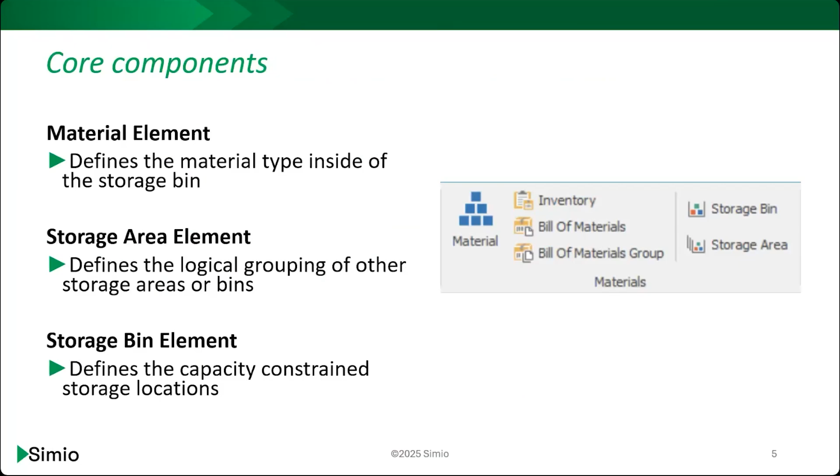To give a little bit of an idea, let's say we're looking at a warehouse with racks and product inside these racks. You might think of an area as the entire racking section, and within this we might have another sub-contained area that could be aisle 5. Within that area, we might have zone 1, composed of various bins - the bottom layer bin, the top layer bin, etc. And within those bins, we have all of our materials. This gives us a visual idea of what we're trying to represent with all these components.

And why is this so powerful? Why is this such an important aspect in the simulation space and within Simio? The first bit is it can help us define capacity constrained bins and areas. We don't have an infinite amount of space to store all of our material. If we did, that would be amazing, but that's not real life. We need to be able to simulate those constraints and understand how those limitations actually impact our system.

Through the use of these various elements, we're finally able to add that in a much easier, straightforward manner. Within all of these, we also have different selection rules to easily control how this inventory is accessed. Not everyone has the same rules to pick what product gets selected from what bin, from what area. So we've added the possibility to select what specific rules - whether based on time, priority, location, etc. - you want to use to control this inventory. This can mirror different strategies in your real warehouse operations and allow you to experiment with new ones.

Another great aspect about this feature is it can help you split inventory across bins. We might not have one single bin or a specific area that contains only one product, but materials that need to be split across multiple racks, multiple bins, multiple areas. We have to keep track of all of that. That sounds very complex because you have to track all the materials, possible locations, where those locations are stored, possible inventory levels of each storage area, etc. But now all of that complexity is streamlined and made much simpler thanks to all these elements.

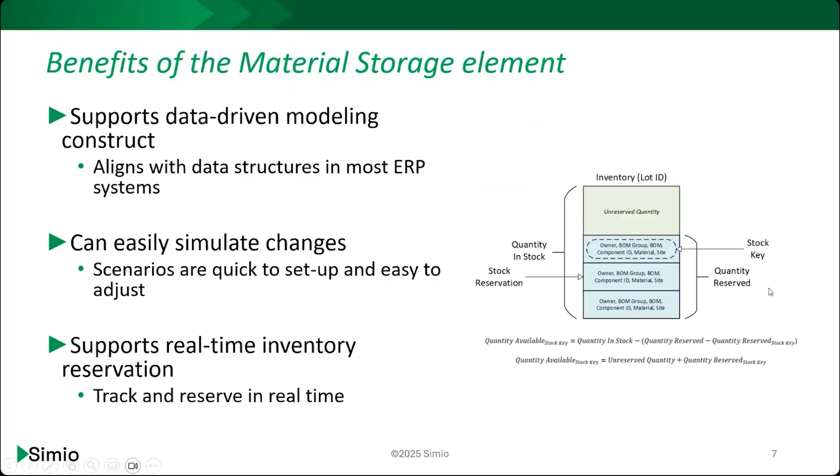Well, then we're going to continue on to the next topic, which is the bi-PASS experimentation add-in.

Great. Thank you, Kiara. My name is Rylan Carney. I'm a developer here at Simio, and I'm going to talk about, we actually added 2 new add-ins that incorporate the bi-PASS algorithm. Kiara, could you switch to the next slide, please?

Great. So the first one is called Reject Scenarios with bi-PASS. You can see it in the screenshot there in the Select Add-in dropdown, which you'll be able to see inside of the Experiments view. The Reject Scenarios with bi-PASS add-in implements the bisection parallel adaptive survivor selection ranking and selection algorithm, that's quite a mouthful, which was designed by Drs. Linda Pei and Barry Nelson. The core purpose of the add-in is to eliminate non-competitive scenarios during experiment runs in order to decrease the number of required replications and find the subset of scenarios with the best performance.

The add-in is defined for cases where scenarios are already created and only the best scenarios are relevant to your objective. So unlike OptQuest, which creates scenarios dynamically, this add-in requires the user to create the scenarios, such as with the scenario generator. On the next slide, I have the parameters for bi-PASS.

The confidence level, similar to a confidence level in any other application. Oh, Kiara, that's interesting, my screen lagged for a second. The confidence level, just like most other applications, kind of controls the aggressiveness by which you're pursuing an objective. In this case, the confidence level is the proportion of retained competitive scenarios relative to the total number of competitive scenarios, and I'll delve more into that in a second. But in other words, a lower confidence level will cause scenarios to be eliminated more aggressively, but increase the risk that a competitive scenario will be falsely eliminated.

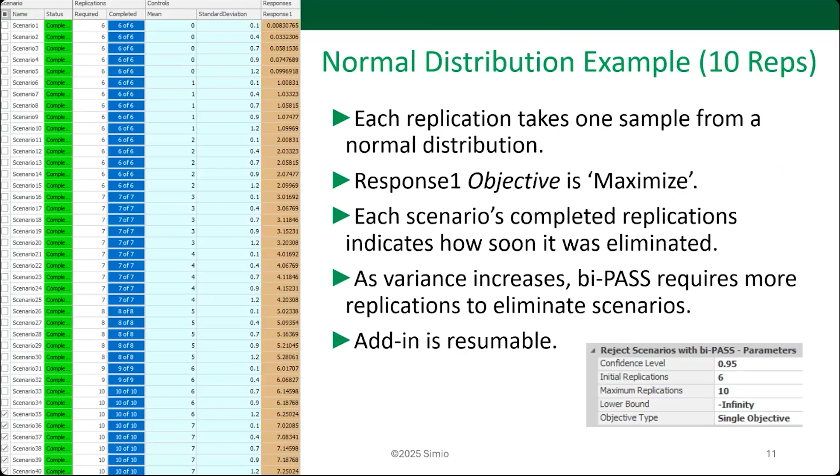This is an example of a competitive scenario being falsely eliminated. In this case, the elimination of a competitive scenario occurs because I've run so many replications relative to the variance of the response. In general, the confidence level can be set to 0.99 to reduce occurrences of false eliminations, but that also increases the number of replications required to eliminate scenarios. Inversely, decreasing the confidence level to 0.9 would cause scenarios to require fewer replications to be eliminated, but increase the risk of competitive scenarios being falsely eliminated.

Something else to point out is we tripled the maximum replications from 10 to 30 and only eliminated 2 additional scenarios. So outside of the fact that all the remaining scenarios have the same mean, this is a good example of how running bi-PASS, specifically the reject scenarios with bi-PASS add-in, can begin to have diminishing returns. bi-PASS by itself is the right tool for removing poorly performing scenarios, but it isn't the right tool for finding the best scenario. On the next slide, I've shown an example.

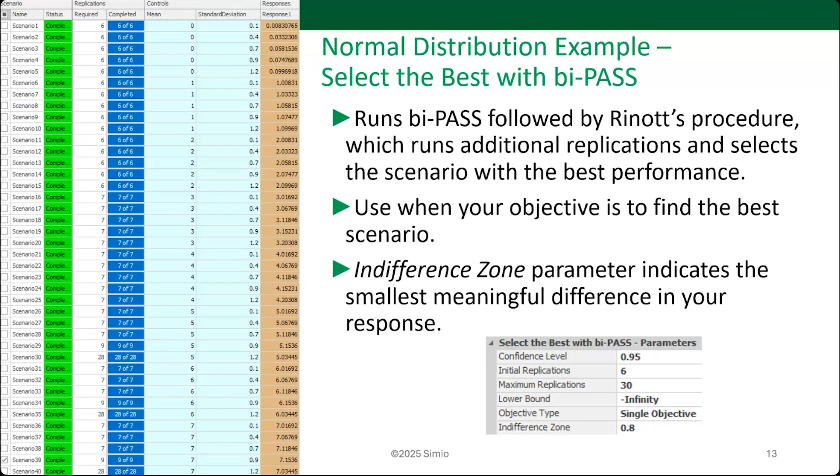Perfect, thank you, Rylan. All right, and like I said, if the person that asked the question that I did not read off, please feel free to reach out. If we don't get to it at the end, we have 2 more topics to go. We might be able to get back to that question, but I think just by reading the question, it's a pretty in-depth answer, so it might be one of those ones we either take offline and address, or please put your suggestion or vote in for bi-PASS being one of the topics we do a deep dive on in less than a month. All right, Rylan, thank you. Kiara, next person.

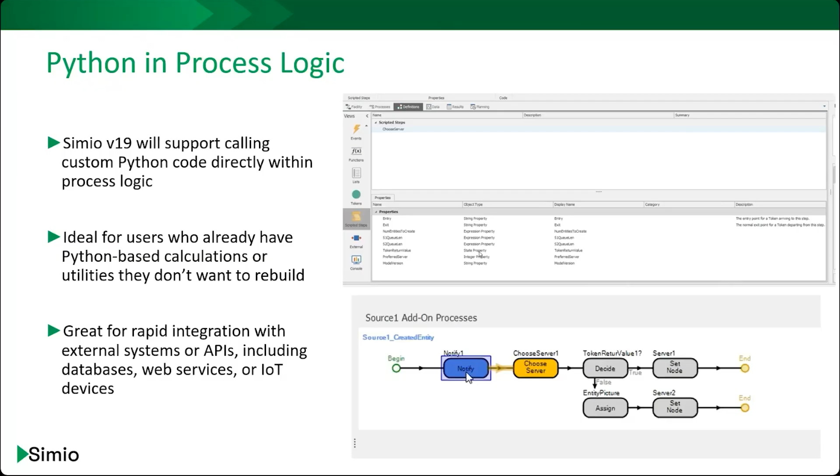One of the things Python does really well is data-driven calculations. You can now bring that capability directly into your Simio models. With just a few inputs from your simulation, like entity states or timestamps, you can call a Python step, and it can perform real-time forecasting.

It can do curve fitting, or it can dynamically estimate processing time. It's fast, flexible, and completely embedded within your process logic. This gives you a powerful alternative to traditional Simio expressions, especially for complex or nonlinear logic that would be difficult to manage inside of Simio.

Another major advantage is you no longer have to embed large reference tables inside your model. Instead, your Python script can act as a smart calculator. It can take a few values and look up or compute that answer externally and return the result to Simio instantly. Now we can also look at how Python can link to real-time external controllers.

This is another exciting use case where you can link your simulation directly to something outside of Simio. Let's say you're working with a warehouse automation project and you want to consider adding AMRs. If you've tried to do this in simulation before, one of the first steps is building the logic around fleet management - deciding when the AMR gets assigned to what task, how to do it. Traditionally, this means recreating all that logic within Simio.

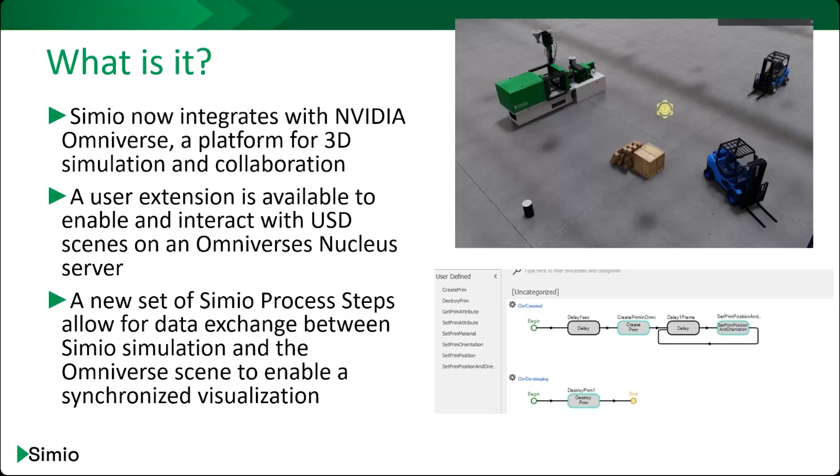OpenUSD, which stands for Universal Scene Description, was originally developed by Pixar and is an open, extensible framework for the interchange and collaborative editing of 3D scenes. At its core, OpenUSD is a scene description format and API that enables highly scalable, non-destructive workflows for complex 3D content. It allows multiple users and applications to work simultaneously on the same scene without conflicts. It supports rich features such as layering, variant sets, asset referencing, and instancing, making it ideal for modern collaboration environments.

It emerged as a foundational technology across industries like film, gaming, simulation, and industrial design, thanks in large part to its adoption and expansion by NVIDIA Omniverse. NVIDIA Omniverse is a real-time simulation and collaboration platform for 3D content creators and engineers. OpenUSD is the backbone of Omniverse, enabling interoperability between different tools and users. By leveraging OpenUSD, Omniverse allows diverse software applications to exchange and co-edit assets in real time without converting file formats or losing fidelity.

To get started with Simio's Omniverse integration, you will want to go to the Simio LLC GitHub page, which Dan mentioned earlier, and then download the Simio Omniverse connector folder from its repository. This folder contains 8 additional steps, a new element, and a new connector that allows you to have your Simio project interact with NVIDIA's Omniverse.

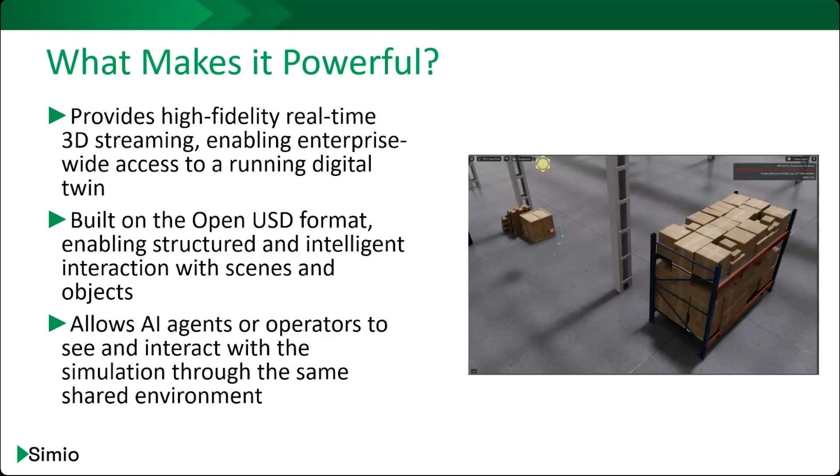Dynamic parameter adjustments, where users can modify simulation parameters in real time and immediately observe the visual impact of those changes, can accelerate the optimization process through intuitive feedback. Lastly, the AI-ready framework creates a foundation for artificial intelligence agents to observe operation patterns where they can learn from system behavior and potentially influence simulation performance through adaptive algorithms.

On the Simio GitHub page, there's a warehouse example USD file as well as a corresponding SPFX file that we will demo in the next slide, showing an easy way to get started integrating Simio with Omniverse. As the forklifts move in Simio, they move in real time in the 3D scene by updating position and orientation. A user can adjust forklift speed in Omniverse, and Simio will read that data in from the USD during runtime.

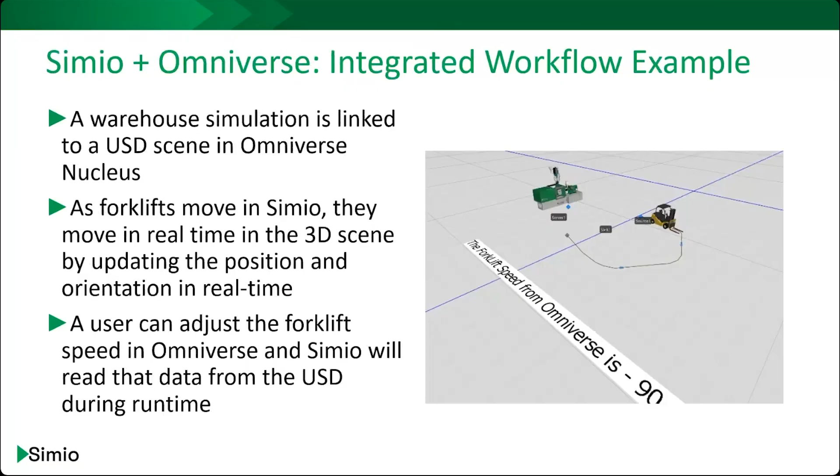In this video, you can see Simio on the left and the USD composer on the right. As the Simio run begins, the forklift is created in the facility view on the left, and if you look at Omniverse on the right, you'll notice the forklift has also been created in that session. In both windows the movement is identical—what happens in one happens in the other. When the forklift enters the sink in Simio, it also leaves the Omniverse.

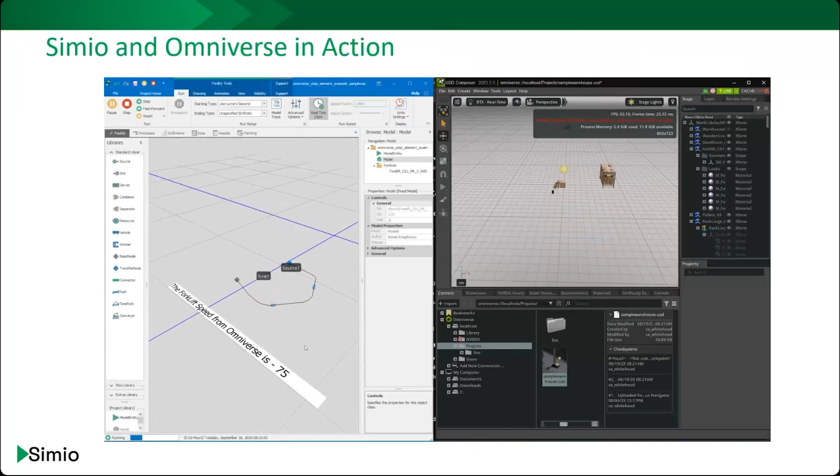So why use Simio for NVIDIA Omniverse integration? The integration of Simio's discrete event simulation with NVIDIA Omniverse creates a powerful synergy that addresses the fundamental challenge facing digital twins: balancing analytical precision with intuitive understanding. While simulation provides the mathematical foundation for accurate operational modeling, capturing complex system dynamics, variability, and interdependencies with statistical precision, Omniverse transforms abstract data into intuitive visual representations that reveal spatial relationships and physical constraints impossible to discern from numbers alone.

This combination delivers comprehensive operational intelligence by compressing time while maintaining spatial awareness. Simio's technology accelerates time, allowing organizations to evaluate months of operational performance in minutes, while Omniverse adds crucial spatial context by accurately representing physical environments and movement constraints. Together, they ensure optimized solutions work not just theoretically, but in actual operational environments with real physical constraints.

The integration bridges the communication gap between simulation experts and decision makers by pairing statistical insights with compelling visual narratives. Complex concepts become accessible to stakeholders regardless of technical background, building consensus around improvement initiatives through both rigorous analytical evidence and intuitive visual demonstrations. This communication advantage significantly accelerates implementation and adoption of optimized solutions. Organizations implementing this combined approach typically experience faster project approval, more efficient implementation, and greater sustained adoption of optimization initiatives.

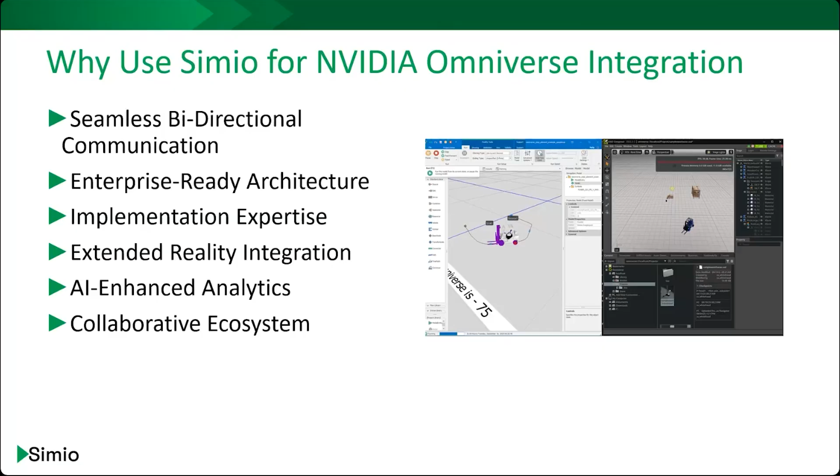And with that, I'll take any questions.

Perfect, thank you Caleb. There's a question being typed in right now, so hold tight. Rylan, are you still here? Just circling back to one of your questions. Sure, all right, perfect, so let's go back to one of the questions on bi-PASS, and then Caleb, as soon as this question gets typed in fully, I'll ask that and we'll wrap up. I'm going to try to keep this question brief, Rylan, but if you need to go more in depth, feel free.

The question was, can you give a technical definition of how Simio understands competitive scenarios? In other words, what exactly does that mean, competitive? And can that definition be modified by using different parameters, ranges, variables, etc.?

Competitive is actually not a Simio term—that's a term used by the creators of the algorithm. In terms of the algorithm, competitive just means best. But because best is usually used to mean the one best scenario, they use the term competitive to essentially mean the subset of the best scenarios.

Can that definition be modified? I guess it depends on how you think about it. It could be modified in the sense that if you have multiple responses, some minimized and some maximized, you can set the response weights—one response might be very important to the objective function, and one might not be. In that sense, yes, you could change what is best because you're defining what it means to be the best. But you can't do it by setting one of the bi-PASS parameters itself—you can only do it with the response parameters.